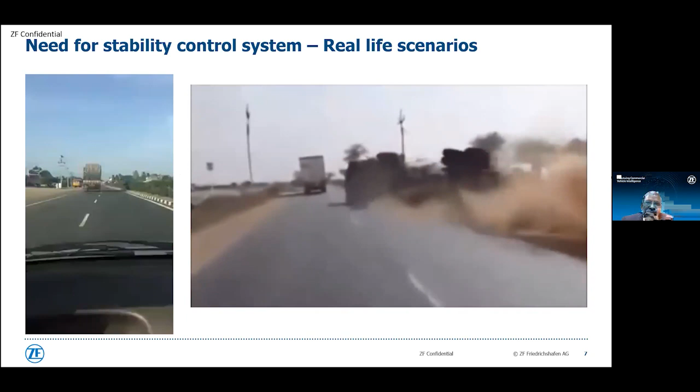You can also see the other slide, other video.

What these two videos actually tell us is that it's not adequate to have only the directional stability which ABS provides. The lateral stability, which is called roll stability, and vehicle skidding, which is called yaw control, are very important to keep the vehicle stable under very dangerous driving conditions.

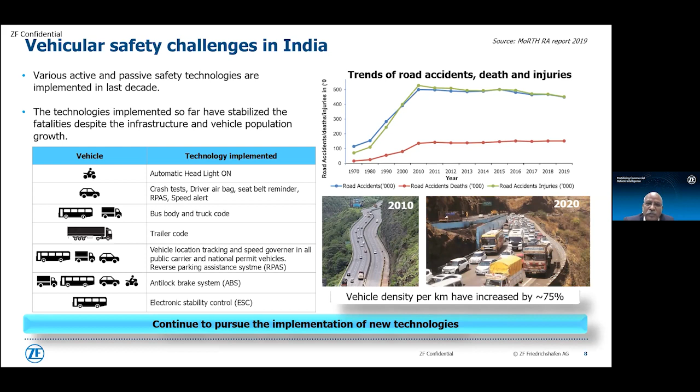I think India holds the dubious distinction of the largest number of road fatalities anywhere in the world. Even though we are only about 1% of the vehicle park, about 8% of road accidents happen in India. So the technologies implemented so far have stabilized the fatalities, but we have a long way to go. It has been stabilized despite the poor infrastructure and very high vehicle population growth and the increasing power and speed of the vehicles.

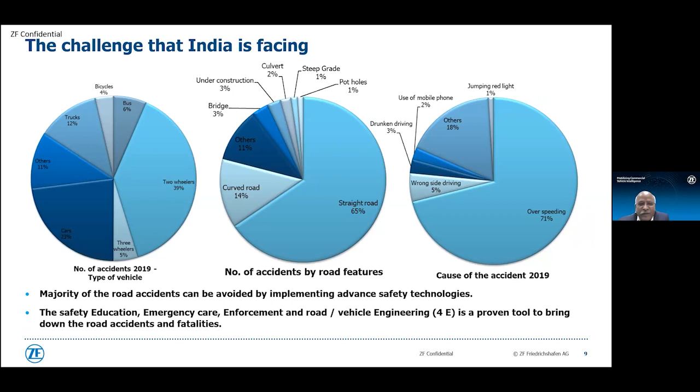Now I come to the electronic stability control itself. As I said earlier, ESC is the first step towards autonomous driving.

It automatically intervenes to improve the vehicle stability against roll and skidding. Unlike ABS, which actually comes into effect on very panic braking conditions, on those critical incidents.

But in the case of electronic stability control, it actually monitors the stability of the vehicle in real time, and then it intervenes whenever the vehicle becomes unstable, automatically. I would say in a way it's like a hand of God to the driver, because without his recognizing it, this actually constantly monitors the stability of the vehicle and applies the brake or intervenes in an intelligent manner and brings the vehicle to control. That essentially is the role of ESC.

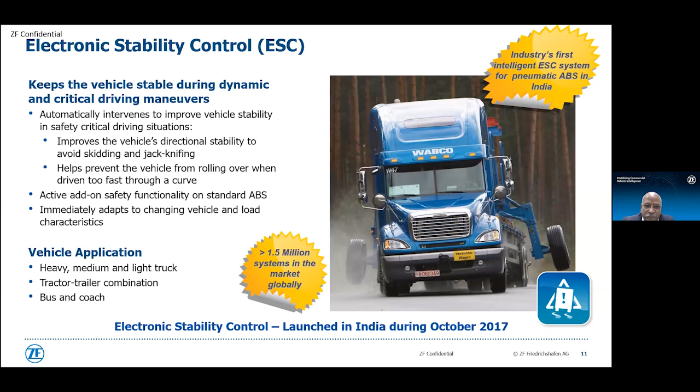The system automatically applies brakes on all wheels to avoid rollover. Selective wheels are also braked to provide yaw control to avoid vehicle skidding. The lateral acceleration, yaw, and steering angle are the critical inputs for the system to keep the vehicle under control. The vehicle constantly monitors the lateral acceleration, yaw, and steering angle in real time, and these are the key inputs for the ESC to bring the vehicle to stability.

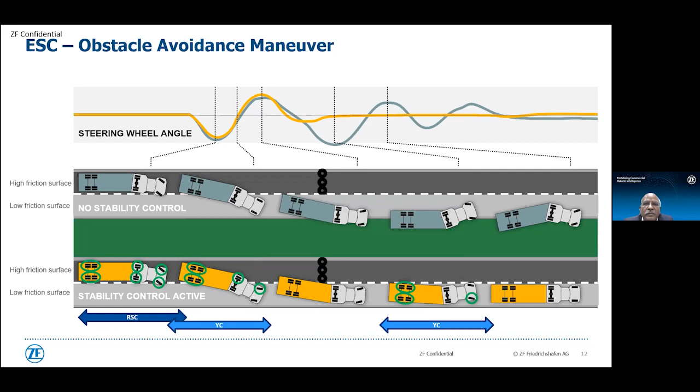The closed loop system continuously monitors the vehicle behavior around its vertical axis and automatically performs engine control or brake control depending upon the critical driving conditions.

The closed loop system continuously monitors the vehicle behavior around its longitudinal axis as well, both in the vertical axis and in the longitudinal axis, and automatically performs engine control and brake control depending upon critical driving conditions. This essentially explains the way the control is affected in real time.

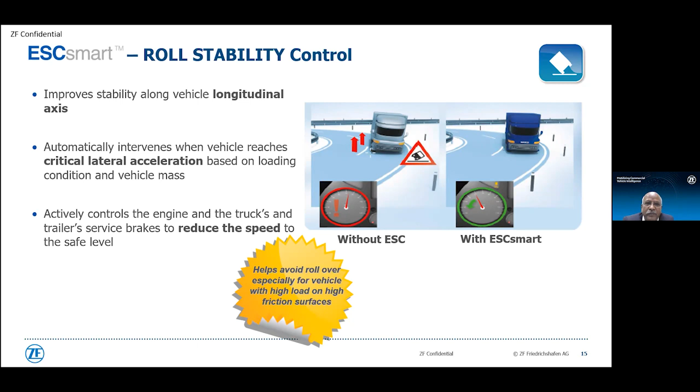Now on the video, I have one here. You can just see a video.

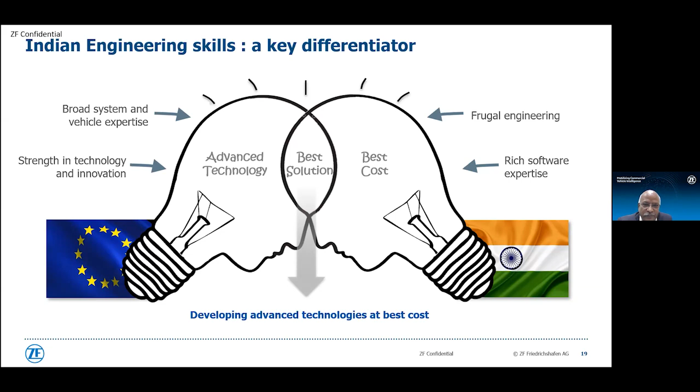Indian road conditions are very unique. Any global system cannot just be adopted as it is without proper refinement to suit Indian usage conditions. So

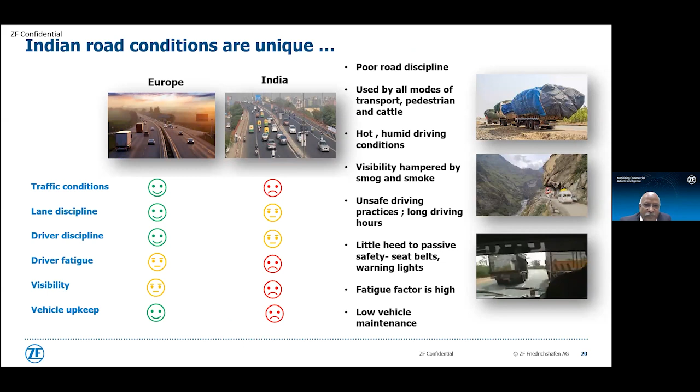We follow a unique approach to refine the electronic stability control to suit Indian driving conditions. Actual usage condition data was created by driving the vehicles pan-India, covering multiple terrains, traffic and climatic conditions.

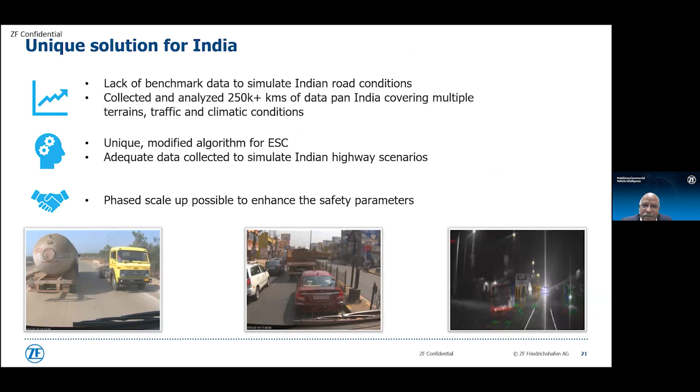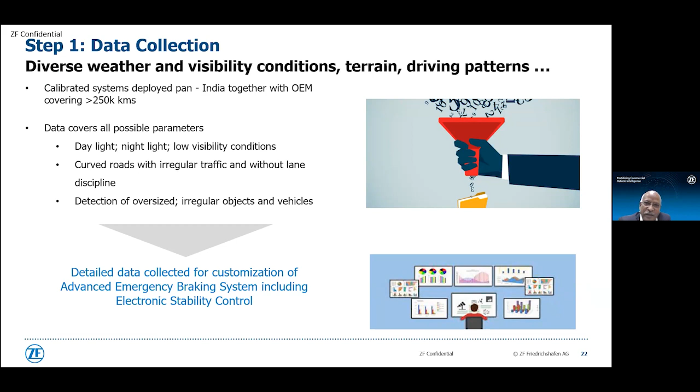This gathered data was filtered to arrive at appropriate fine tuning in the ESC algorithm. So the solution we are offering in India, or what is required to be done in India, is essentially not what is available in Europe or any part of the world. It should be adapted and tweaked to the Indian requirements. That's the message. The database refinement helped to arrive at a best-in-class ESC system to suit Indian driving conditions.

An example of a double lane maneuver is shown here, and the left side graphs indicate lateral acceleration versus time. With ESC off, vehicle speed at exit is 69 kmph which will lead to vehicle rollover. With ESC on, vehicle exit speed is 55 kmph due to system intervention, and the vehicle is stable. The right side graphs show the yaw movement of the vehicle, which is also controlled due to system intervention. The threshold values are defined for every vehicle platform to arrive at final parameters.

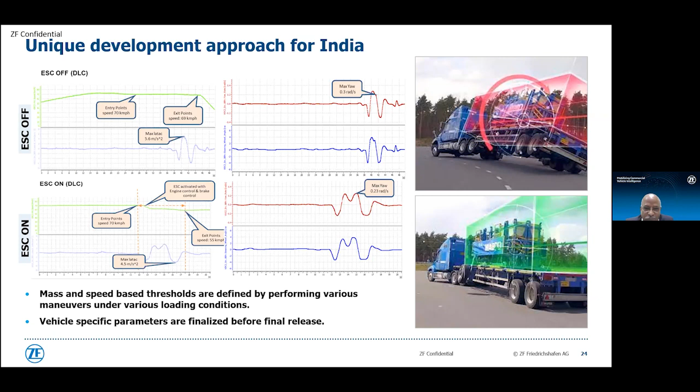In slide number 25, various maneuvers are performed to simulate roll and yaw under different loading conditions of the vehicle. Same maneuvers are used during homologation to assess comparative performance with ESC off and ESC on.

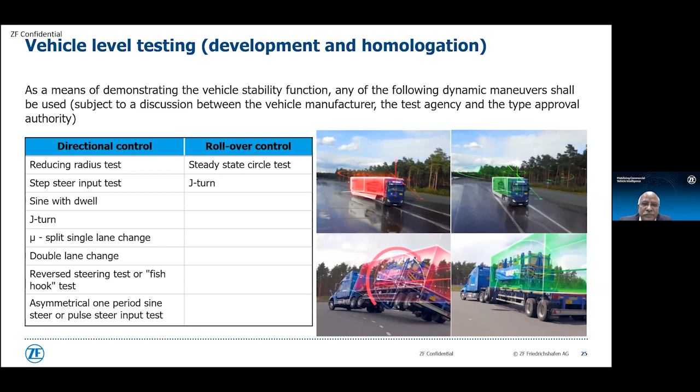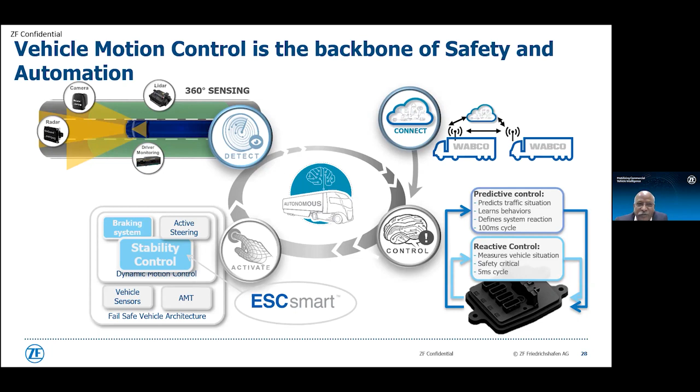I have a few more slides to share on how ESC is actually a building block for autonomous driving. ESC is the first step towards autonomous braking. This is the stability control, the first step towards autonomous braking. Additional sensing devices like radar and camera pave the way forward towards autonomous emergency braking systems. So you have the basic ESC on which you build further capabilities using cameras, radars, and various sensing systems.

ZF is a one-stop solution for sensing, processing, and actuation technologies to achieve level 4 autonomous braking. As I said, the basis is ESC. ESC, along with various ADAS technologies, are the enablers of next generation mobility.

Towards better safety, fuel efficiency, and optimized vehicle integration, ESC works with the various advanced driver assistance systems and builds that intelligence to provide those capabilities. ZF is a technology partner to bring next generation mobility.

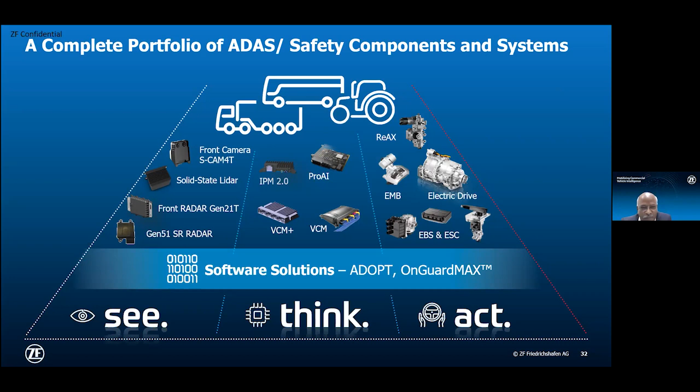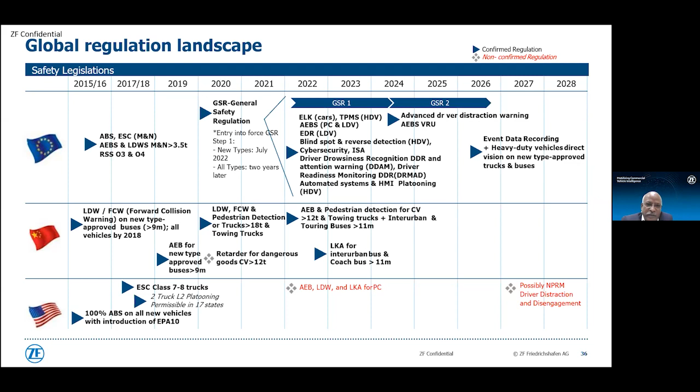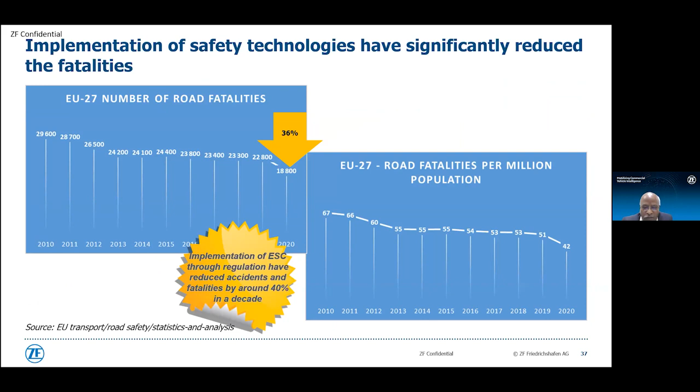And that completes my presentation. I think we have another 15 minutes, so we can have discussions and take questions. Thank you so much. We have a few questions, so first I would like to take the first question.

The first question is from Mr. Ajay Sankaran. He wants to know, in the slide of side radar, if the vehicle detects a moving obstacle in its blind spot, how can we make it detect whether that vehicle is stopping, or should we stop to avoid mistakes? I have some of my experts here, so I will take support from them.

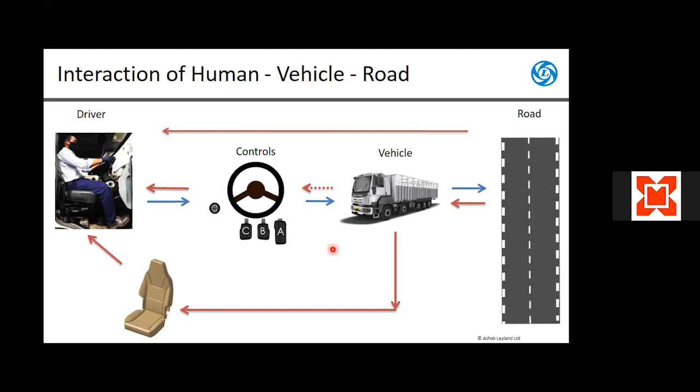So in general, if you commonize or generalize all these expectations in the controls, there are three things which come to mind. First is safety - you should always feel that the controls are safe. You shouldn't get stuck, you shouldn't get a shock load. So you should get a sense of safety first.

And then comfort. So all these controls, typically the driver holds or operates this continuously during driving, and in a day sometimes trucks cover around 400, 500 kilometers. So in all these things, they should have minimal fatigue impact. You cannot have larger efforts. At the same time, it should also give a feedback.

Now coming back to the last point of giving confidence - this is one of the most important things. While ensuring the lowest level of forces to make it comfortable, we should also give a sense of feedback control that gives overall confidence. Like I said earlier, you apply a brake, the pedal moves, you're getting a higher force level in the foot, but the vehicle is not stopping yet. If you still apply more brakes, it may end up in a full stop, but since you are not getting that feedback, you won't feel confident about the braking at all.

This happens even in steering. You can try to get this feedback. Typically, if you drive back-to-back different cars from different OEMs, you may sense this immediately - how they have their brand statement and how it is set up. Typically, as you increase the corner, there'll be an increase in force, and when you come to the center position, there'll be a reduction in force. And even over a straight line, you should get a feedback in the steering wheel saying that you are remaining in the center region and not going too far away.

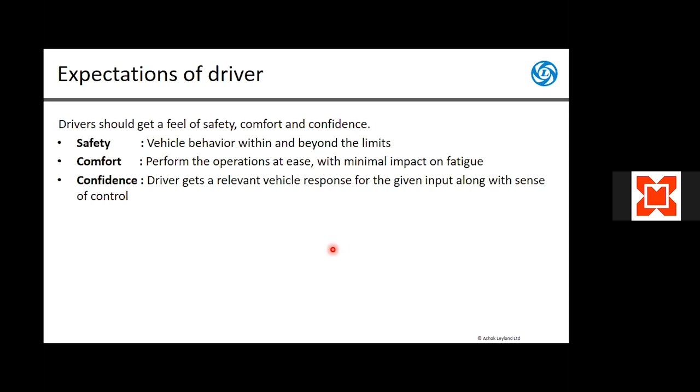We call this a major attribute, and then these major attributes again apply to the individual topics of safety, confidence, and comfort, and can further be detailed into sub-parameters, or sub-attributes. I have listed down some of the key sub-attributes here. In case of ride and handling: bounce, roll, and pitch.

For example, if the vehicle rolls - if you negotiate a corner and the vehicle typically rolls - depending on the amount of roll you experience, you may get a sense of safety or you may feel unsafe about it. And for example, when the driver applies a brake, either you as a driver or as a passenger, if there is a diving or pitching motion, you may feel a little more unsafe about it.

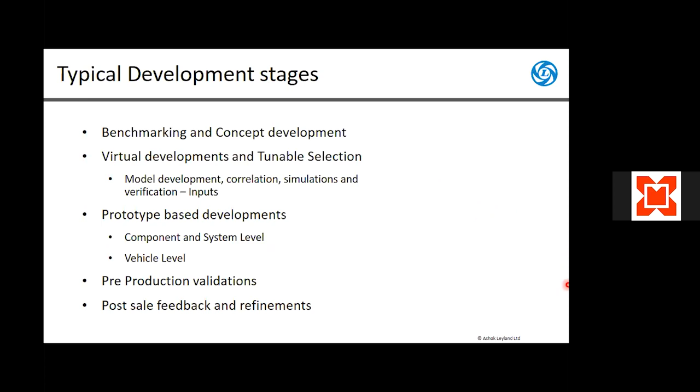And the methods adopted - while doing all these things, typically these are the three major methods which we use during each development stage: subjective assessment, objective measurements, and virtual simulation.

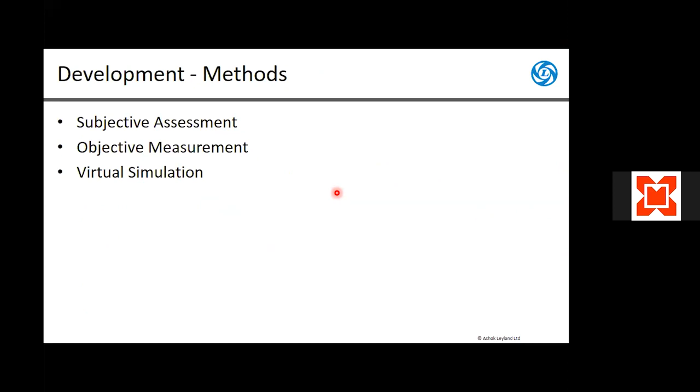We'll look at each of these in great detail. First is subjective assessment. I think if you're in this conference, you've heard a lot about subjective assessment.

To start from the basics, typically what happens here is the driver or an engineer drives the vehicle physically in the real world condition, and then evaluates the vehicle on different parameters. Based on that evaluation, qualitatively, he will give a feedback about it. So these are more based on the subjective, meaning his own judgment of it, how it feels.

It's very, very important - everybody will understand it's all about the control, and until you sit in the driver's seat, you won't know how it perceives, how the control perceives. So typically everything starts and ends with the subjective assessment. You start with understanding how your benchmark feels, and you end up in the final product and how your customer feels about that product - whatever you engineered, whatever you targeted - whether the customer is also getting the same feedback subjectively. So it starts and ends in a subjective field. This is one of the very important tools or methods, I would say.

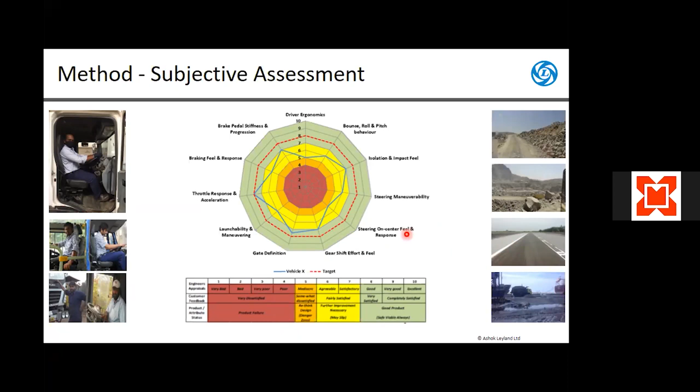So is all this subjectivity good? To support this subjectivity, there needs to be a lot of measurements. Although there are a lot of debates depending on attributes about what you can objectively measure, and some attributes you may not be able to clearly measure, you still tend to measure and try to come to a closer measurement, which will communicate to the driver, the engineers developing the system, or the simulation engineer simulating the system, to improve performance.

Because unless you measure anything, you cannot manage. Typically this is a statement, right? So finally you want to measure. You can see some of the instruments typically used. The top ones are accelerometers.

Uniaxial accelerometers, triaxial accelerometers - you place these everywhere, typically at the kingpin, in terms of trucks, on the axle, just above the suspensions, above the chassis, near the engine location, and capture the vibrations. The intensity of the vibration, the frequency at which it happens, the way it gets transmitted - all this will be assessed using this vibration data.

Sometimes you also use string potentiometers to measure how the suspension travels. This also gives a lot of indication. If you want to calculate the roll, you find out the left and right suspension travel, and based on this you calculate the roll and find out whether this roll is okay or not.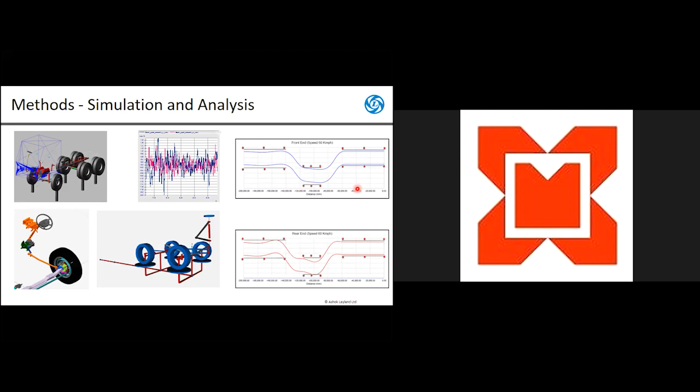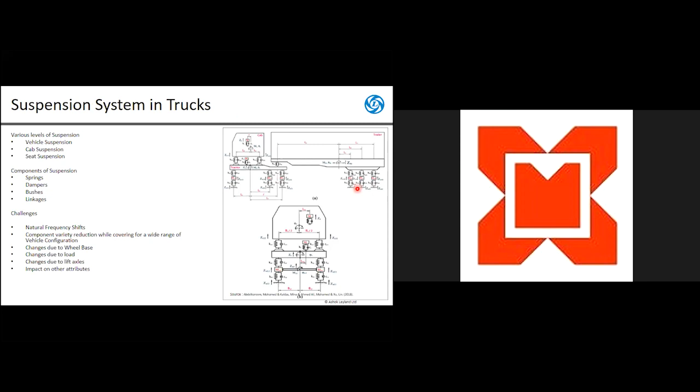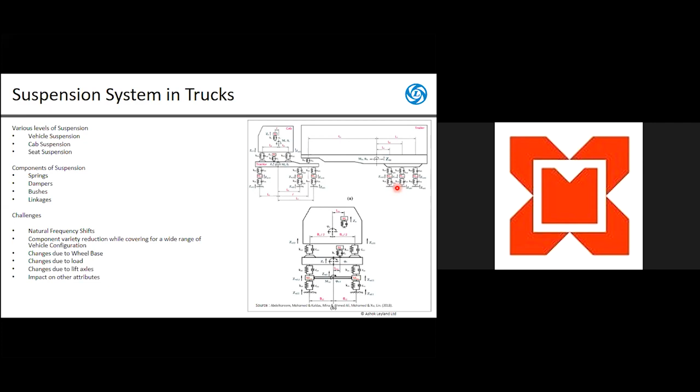Now coming to the complexity in terms of trucks - unlike typical cars, you have multi-level suspension. You have the vehicle suspension primarily, where the tires act as an isolation component with mass and damping. Then you have the primary or chassis springs, dampers, and bump stops. And then one more layer called the cab suspension, where you again have a lot of kinematics and suspension. Depending on the configuration, there'll be more variants like front pivoted, front hard suspended, or rear suspended vehicle.

And there are rigid cabs where you don't have any suspension at all - all four corners are supported by bushes. There is also a complete fully suspended cabin where you have springs and dampers in all four corners, with their own anti-roll bars and their own end-stop bushes. This makes it more complex as well. Why do you need suspension in the cabin?

Again, another challenge in the typical truck is the load change. Unlike typical other vehicles, the change in load is very, very vast. For a truck, the unladen weight will be around 4 to 5 tons, and laden weight will be around 10 tons - almost a 2 times increase. In the rear, it is much larger, 4 to 5 times between laden and unladen condition. This gives a unique challenge - you may want different suspension, but you still have the same suspension, right?

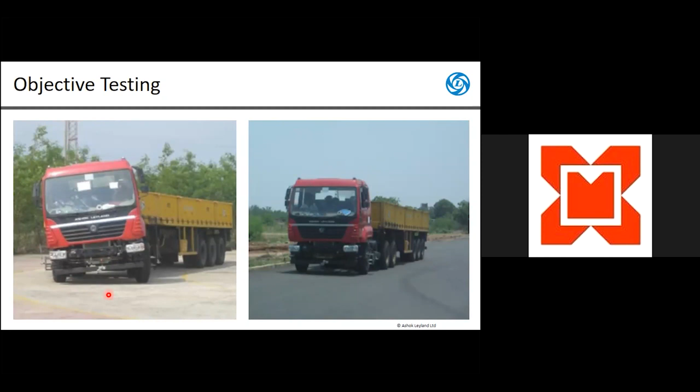Coming back to the steering system, as we discussed, it'll typically be hydraulic-assisted. There's also a norm which says that without even assistance, this is the maximum load you can sense at the steering wheel. So you may end up in a situation where you want to give a lot of assistance, but without assistance, it should still perform well.

When it comes to assistance level, there are a lot more technologies available, but till today, the wide range of products goes with plain hydraulic assistance, and you want to tune this assistance level to create a sense of safety, comfort, and confidence.

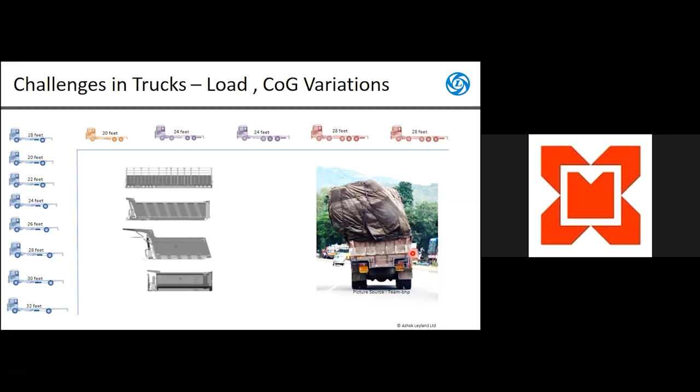And the challenges, as we saw in the videos earlier today, how typically the customers use and abuse this. Typically, in a situation in India, in an uncontrolled market, how things are loaded. For example, a loose load - whether even after adding things like ESP and others, will it mitigate the problems of having a loose load? Whether longer pipes or very concentrated loads affect how it acts. These are typical challenges which, going forward, we have to work on.

I'll skip this slide, but the only point I wanted to make here is we are moving towards a virtual world, to save on time and cost. Mostly the future is definitely going to be virtual development, and most of the effort will go into this, where we have to do a lot of model development, refinement, and correlation between the real and the virtual world.

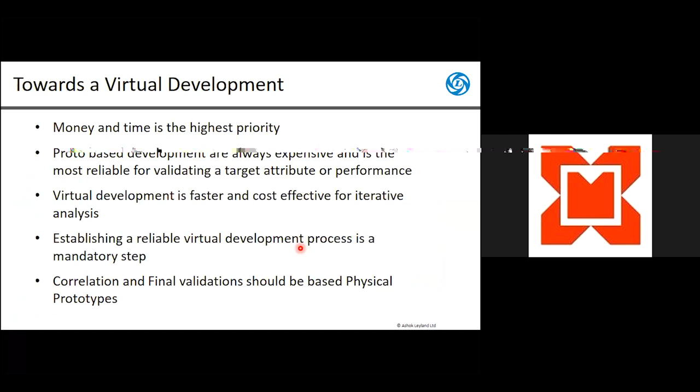I wanted to spend some time on this for anyone new to this field of vehicle dynamics, or an aspiring engineer who wants to learn more. Some points for them: first, aim for a full stack development. As we saw, there will be a lot of assessment in the way you look at this - one is subjective assessment, one is objective measurement. You do a lot of virtual models and work on different technologies. But if you really want to excel, or understand the whole world, you should work on all of these aspects.

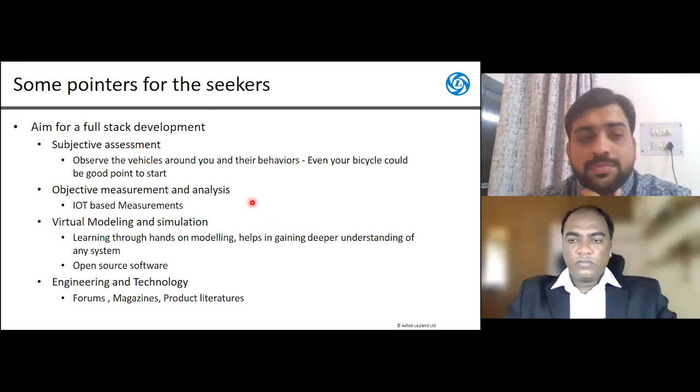Now, do you really need to get into a real industry engineering setting, or real development areas or OEMs? No, you can even use your bicycle and understand these things. You can even observe a lot of trucks and buses or other vehicles on the road. I have seen a lot of engineers doing this, and inspired by them, observing and then ending up working in the real world, in a typical industrial setting. So your observation is the key here.

Whether you travel in a bus, you keep observing, find out what happens, how the driver is doing all these activities - that's one aspect. Another is objective measurements. You need not end up waiting for expensive measurement tools. You can explore latest IoT technologies, cheap accelerometers and other things, whether we can use this as a tool to understand this.

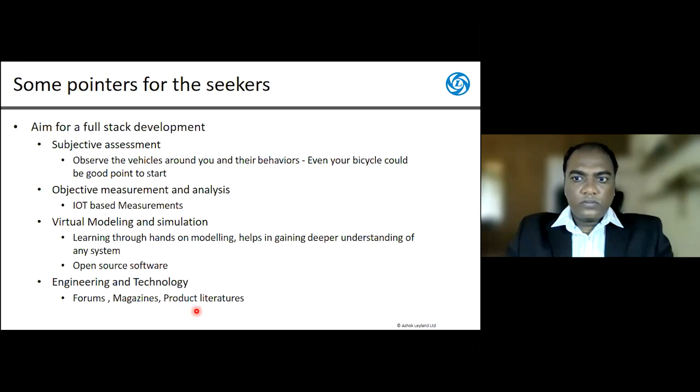And virtual modeling - I very strongly advise you to work on developing your own models hands-on, not use the models of others. Try with your own hand, not necessarily with any very high-end softwares. Even start with a simple hand calculation or an Excel sheet or tools like Python. I have one more slide giving you a thought about this, the open source software, where I have some thoughts. And then engineering and technology - you need not really get all these things in an industrial setting. You can also look for forums, magazines, and product literatures to get some understanding about the product, the components, and then use this as a starting point for doing your calculations and maths.

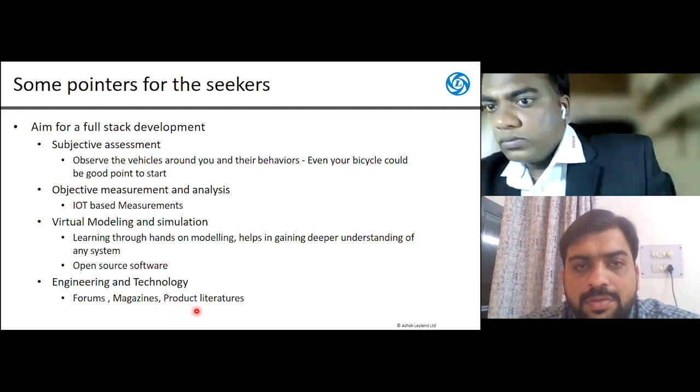This is one very interesting software which I came across, Open Modelica. What is this? This is a Modelica-based modeling and simulation environment. It is open source, so even a student can use this. They typically come up with drag and drop models. If you want, you can also get into a lot of detail and work on the equations as well. You can see them visually working on, and you can work on the equations level.

And if you have the means, you can also purchase proprietary softwares and extend this capability further, deeper. So this is an open source software, but using the same model, you can put it into a proprietary software as well and develop it. This software is very much integratable with other things like Python, MATLAB, Julia. Therefore, if you want to do an iterative development, or understand how a sensitivity analysis needs to be performed, it can be integrated with others.

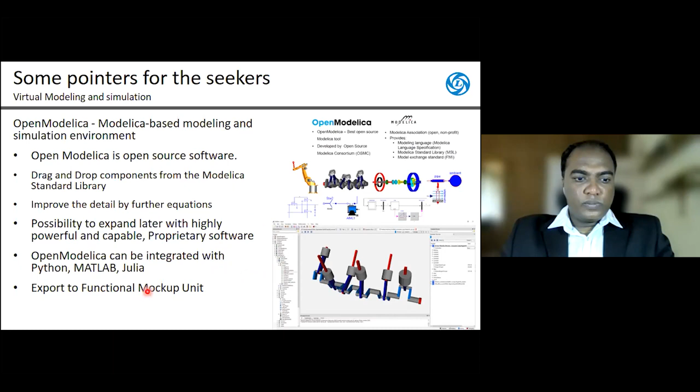A very interesting and important feature, I think one of the new technologies, is the functional mockup unit. You can export this model into a functional mockup unit, and this, I believe, is an important technology because in a typical OE setting, you cannot share or extend the model since it has a lot of proprietary content. So what this functional mockup unit does is encapsulate all the models, the parameters, the inputs, everything into a digital model.

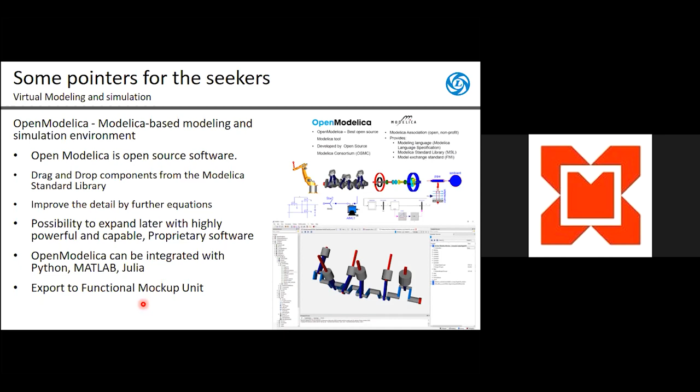It won't expose all the equations underneath. At the same time, you can share it and use it across other simulation softwares - in recent times, they have an interface for doing this, and this interface is standardized at different levels. So FMI 1, FMI 2 - these are the various levels of standards getting implemented. I believe this is one of the futuristic technologies which will come into play, and it's very important when people work at a component level in the early stage of programs.

Thank you, thank you for your patient listening.

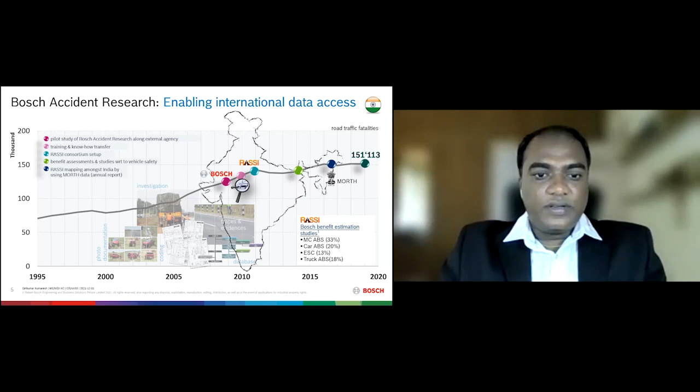Today I will get you into how exactly we do one particular loss of control accident - that's one type of accident. As I was talking about RASSI, Road Accident Sampling System, this is not Bosch alone. It's almost 80% of Indian OEMs and auto suppliers in the team. We all pool money together, share the common raw database, and each team takes the database and starts interpreting it for their own benefit. So this is a consortia where we all sign up together, spend the same money, and access the same data.

If you ask me what the data consists of - scale pictures, images, reconstruction, feed photos, and different parameters. For one accident, we collect close to 1,200 parameters, which talk about vehicle damage, road condition, weather condition, injury status, and which part has the injury - all coded by Abbreviated Injury Scale called AIS. We also understand initial velocity, final velocity, delta V change, and everything. This is how we get this data, and then we develop and do a detailed analysis.

We have teams collecting till now in Jaipur, Ahmedabad, Mumbai-Pune Express Highway, Coimbatore, and Kolkata. The team is stationed there. As soon as an accident occurs, the team is informed either by the police, by locals, or by their own communication channel. The team drives to the nearest accident scene within 2-3 square kilometers, covering all aspects of it, and then we collect the data.

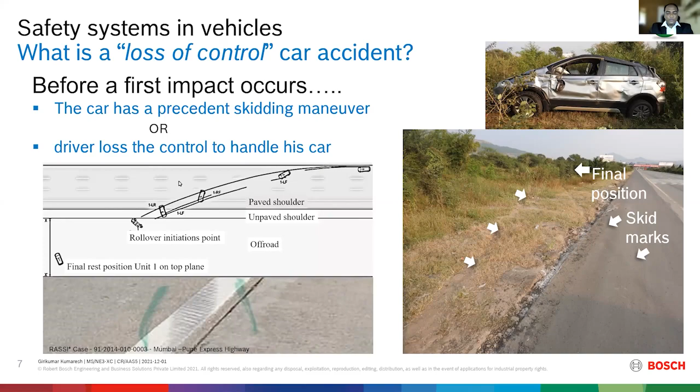The skid marks clearly tell the story—so in most of my accident analyses, when I go to the spot, if I see these tyre marks, that means 100% it's a skid, meaning 100% the driver lost control. Now my question is whether the driver lost control prior to the collision or post collision.

Post collision is when you have some obstacle—for example a pole, a brick, a pavement, or a boulder. You hit that, then do a counter steer, then lose control, producing a tyre-mark skid. That means the first collision happened, and the subsequent second collision is the skid.

In many cases, the skid happens just before the collision itself, and then the collision happens. So when you go to the accident site, you see a skid mark which is very evident, but it's challenging to identify whether it occurred before or after the first collision. That's the overall point, and this is how it is.

Before the first impact occurs, the car has a precedent skid maneuver which can be evidently seen, and the driver loses control—meaning he's trying to handle the car as much as possible, but it is not possible. Now I'll give you another hint.

How do you identify whether the skid occurred prior to or post collision? At any point where you see an obstacle or collision point, if you see debris of glass pieces or marks prior to the tyre skid mark or after it, you can clearly understand whether the accident happened before or after the collision point.

So post collision, you have the debris and windshield pieces, shattered glass pieces, and then you have a tyre skid mark.

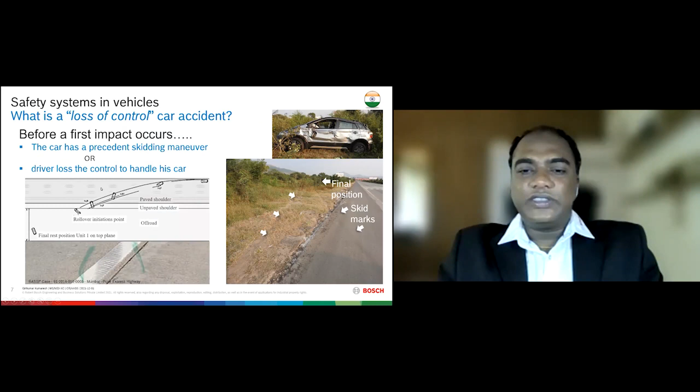So the initial situation is the driver lost control due to oversteering. The reason could be many. Why did he oversteer? Then you have a collision, which could be a simple landing over of the vehicle, a collision with a pole, or a rollover.

Maximum truck accidents roll because the CGs are much higher and the loading conditions are so different that you get a little bit of spin over the vehicle, then a total rollover. In cars, not so much, but still we see like 50 to 60% of accidents prior to collision only with skidding have a rollover.

So rollover and loss of control happen in two main mechanisms: oversteering and understeering. Oversteering is when the vehicle is spinning the rear axle of the vehicle.

If you see here, when you're driving a curve, you will experience that if you're trying to steer your car towards your right, the rear end of the vehicle is pulling out, and many people call it banking - they say it's because of centrifugal force, centripetal force and everything. But the real truth is the yaw velocity is too large, so the vehicle is not able to keep itself intact to the line of motion.

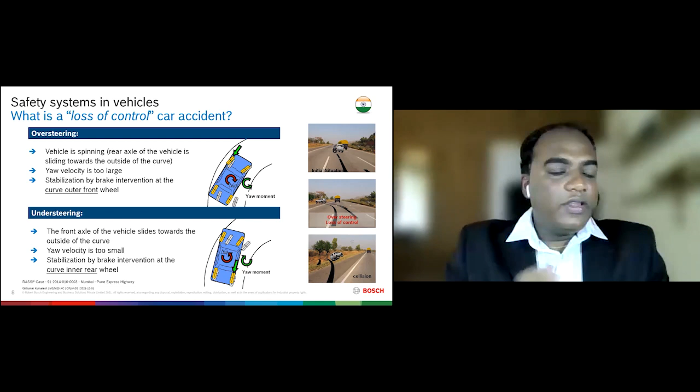Now the same thing happens in the opposite way in understeering. You try to negotiate a curve very quickly and give too small a yaw velocity to the steering wheel, then the vehicle tends to roll outside the curve. This is understeering. These are the two important conditions of loss-of-control accidents.

That's where you have to stabilize the vehicle. How do you stabilize the vehicle? I will explain in the upcoming slide.

So as I said, this is the accident site. What do you see here? This is the same case - I'm talking about only one case, explaining it in detail.

You see the damaged cars here, and an unbelted occupant with an impact on the windshield. And you see the long skid - I showed the previous picture started from here, and then the vehicle ended here. The skid marks are almost 60, 70, or 100 meters before it.

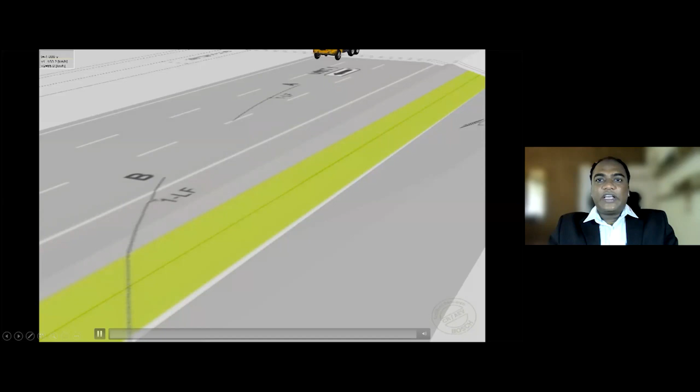I'll just show you how exactly this accident happened. He saw another truck, then tried to steer to his right to avoid an accident or try to overtake - we don't know the reason - but the vehicle completely lost control and went off the track. This is a seriously injured case.

This is how the roll happened, and all these evidences are marked. What you see is data reconstructed from PC-Crash, and it's not just an animation - you have close to 250 parameters embedded into it, and the whole accident is reconstructed.

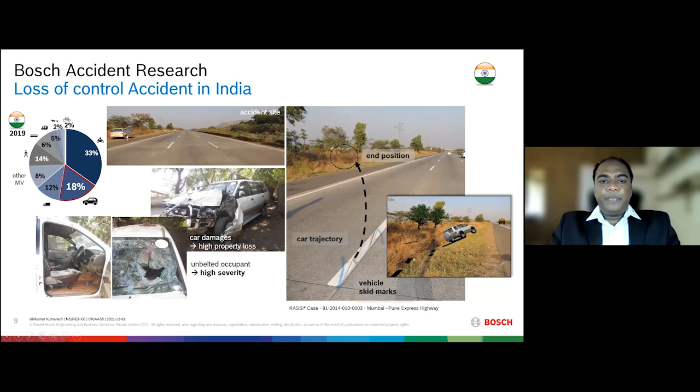Now, what are the real root causes of accidents specific to India? So in India, you see human error and infrastructure related causes, but again I divide this into two phases: pre-crash and crash. In the pre-crash phase it's mainly human error and infrastructure related. In the crash phase also it's infrastructure related. The point is you cannot sum it up because it's individually analyzed.

In human error, you have overspeeding, driver inattention, and drowsiness. It's quite obvious that a sleepy driver gives a sudden jerk and the vehicle again goes for a toss, and a drowsy driver also gives a sudden jerk. With overspeeding, it's sometimes real hard to judge the oncoming vehicle.

And infrastructure related - you have poor marking, poor banking of roads especially in the curvatures, and slippery road surfaces.

Oversteering situations are also related to man-made objects, trees, and intrusions. This is an important factor seen quite evidently in India. You have a loss of control after the first collision, because concrete boulders kept as median demarcation become the first impact when a vehicle loses control, and that boulder initiates the roll or the loss of control. So we are artificially imbibing systems into the accident mechanism, creating more severity through unscientifically designed infrastructure.

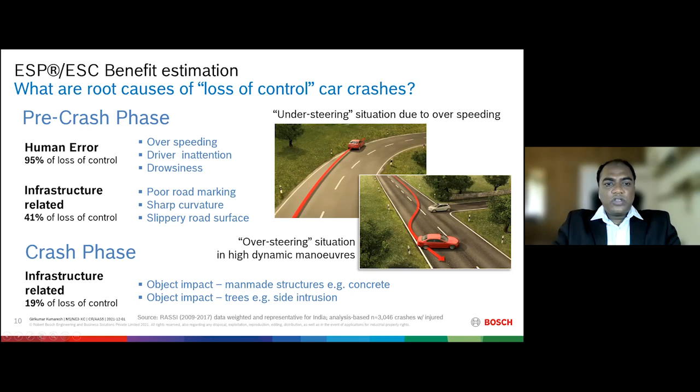The mechanism is similar for any vehicle type, even trucks. Now let me explain the working principle of ESP. Lots of videos exist to understand how electronic stability control works, and previous engineers and panelists showed different videos. I don't want to bring in a video since you're already seeing me in one.

So I'll give a real perspective through a small explanation. The system consists of 5 components: a hydraulic unit attached to the control, which you can consider as the ECU; a wheel speed sensor; a steering angle sensor; and a yaw rate sensor. The steering angle sensor is usually on the steering, with steering angle and yaw rate usually in the middle. Then you have the ECU which decides.

Whenever the vehicle is losing control, if it's going and suddenly you see an object, the driver tries to counter steer left or right depending on intention. When steering to the left, the vehicle responds, but if the steering control is a bit more than intended, the vehicle may not behave as the driver wants. The intended direction is shown, but red indicates the direction the vehicle is actually slipping toward.

If this slipping becomes more severe, you get a direct straight collision with a clear yaw mark on the road, and the vehicle loses control. No matter what the driver does with braking, it's impossible to get the vehicle back in control once it moves beyond the minimum intended slip angle, which is measured by the yaw rate.

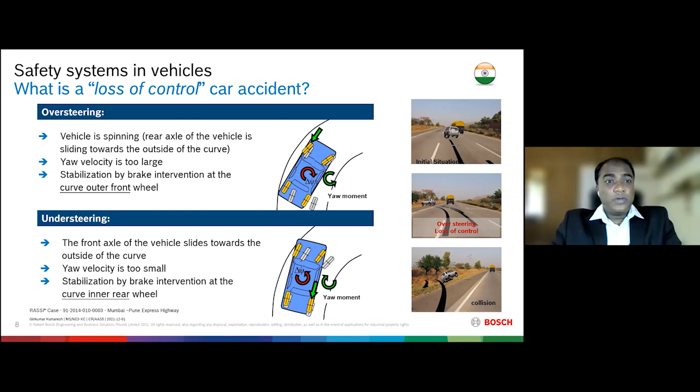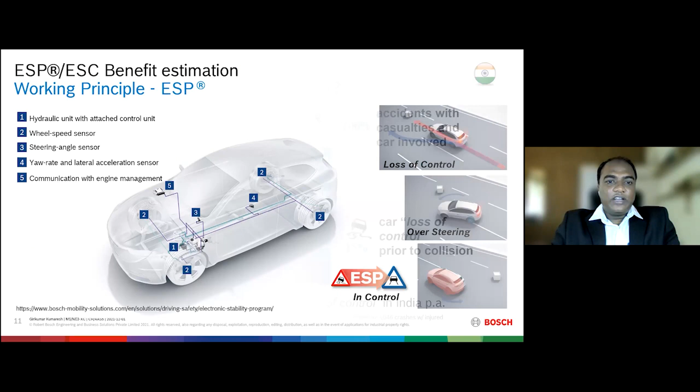Okay, so that's how ESP works. So it's simple. Now, what is its relevance for India? This is the real challenge when I started working on it.

When we drilled into detail on loss of control accidents, most are single vehicle accidents. The vehicle is driving, the driver either loses sleep or tries to oversteer or overtake, and without a secondary impact, the vehicle loses control and hits the barricade or goes off the road. In India, the complex problem is that nobody reports a single vehicle accident. If the car is alone and hits a tree, the reporting does not happen, because the Indian system is designed such that for an accident, two parties have to be there—one is the victim who met with the accident, and the other is the causer of the accident. But in a single vehicle accident, that second party isn't there.

When we drilled into US and Germany data, we saw 40% of accidents were single vehicle accidents, because they have a proper recording system. When I was about to do this electronic stability control analysis, I saw less than 2% of accidents were loss of control, and that too non-reported. That's where we identified there's something wrong.

Then we drilled into the details and did a representative analysis of how exactly this data can be weighted, and what you see here is what exactly India is today. This research is again released with the representative analysis for India—how you extrapolate from 5 different locations to the whole of India is what we discussed.

So what you see here is that almost 270,000 accidents are involving cars with casualties—that is what's reported. Then you have 857,000 as the total car accidents with casualties, and the overall accident number is 1,286,000. That's how we call it, almost 1.28 million.

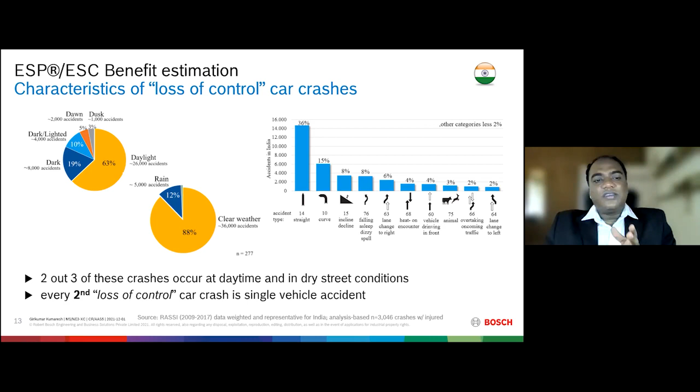Every second loss-of-control crash is a single crash event. That means if I have 100 cases, 50 are single vehicle crashes. Of that 50 out of 100, around 40 cases are not reported. So this brings me to how technology can avoid this.

Now, in most panels we get the same question: what is the cost benefit? This is a very big question we could not answer almost since a decade, because if somebody can say what is the cost involved if one person dies in an accident, we do not have this number.

If you compare to the Western world, you have this number released either from the Ministry of Home, Ministry of Health, or Ministry of Internal Affairs. But in India there are totally different numbers. Insurance guys say some other number, Indian Statistical Institute says some other number, and a uniform number was not available.

We took almost 2.5 years to study close to 300 reports across India and the globe, conducted close to 150 interviews on phone calls and other things during the lockdown phase, and we estimated socioeconomic loss for India altogether, independent of car.

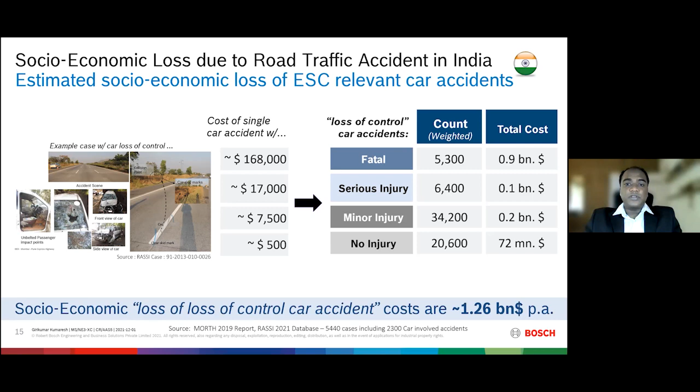I also request the panelists and participants to take up this paper and try to read it, and you are free to develop more methodologies on top of it. This is the base of the method, and this brings us to the last slide to clearly discuss loss of control accidents, which is common in India, and the only thing is, it is not reported.

We have to be really specific. There are a few more types of accidents which are not often seen but are killing so many people. So accident research, the real root cause analysis, going to the scene, doing Sherlock Holmes work, is the real thrill in identifying what is really important.

Then the root cause - inappropriate speed, drug abuse, visibility condition, but less impact through weather condition - is clearly derived out of this particular study.

The potential is up to 33,000 accidents, with total numbering 20,000 road fatalities and severely injured. It's clubbed again - road fatalities and severely injured together. 20,000 people could be altogether avoided with electronic stability control. As I said, this one line does not belong to this particular study, but it comes from the latest research.

To give the link for the next line, social impact for road accident crashes starts up to $38 billion. This is the first time ever we did this study, which constitutes 1.35% GDP annually. Thereof, electronic stability control and the relevant costs constitute about $1.26 billion per year. This is only the vehicle estimated.

Still, infrastructure and human cost is not added to it. If you add that, then we have another number. ESP facts, already published by Bosch: 80% of all skidding accidents, irrespective of region or country, can be directly avoided by electronic stability control. For more information, you can refer to the benefit estimation of electronic stability control in SAE International.

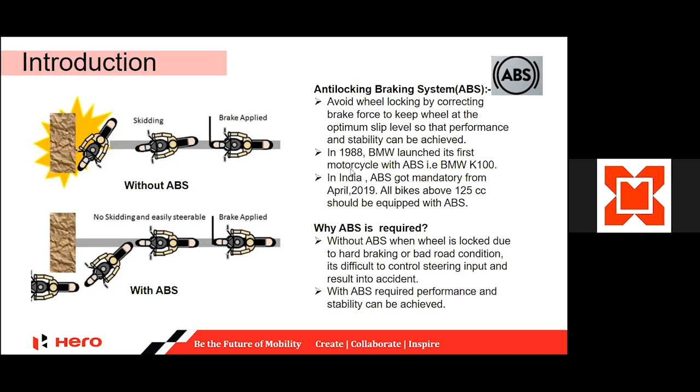And moreover, with ABS, we are getting whatever the rider wants. For example, for performance we are also getting in line with that, and also the stability we are achieving, which ensures the safety. So this is the introduction part.

Now I will go into the basic concept of how ABS actually works. I'm discussing single channel here because it is similar to two channel, four channel, which is in the four-wheeler. So what will happen?

Initially our ECU, we call it HECU, which is hydraulic electronic control unit. Why is it called HECU? HCU plus ECU means electronic and hydraulic valves are inside. So we used to call it HECU, and in four-wheelers we call it ESP, ABS, different HECU, HCU — that's the naming by different tiers and OEMs to rename the object in their portfolio.

So basically, first the ECU will detect the wheel — how it will detect the slip. For example, in a single channel system, there is a slip when the user applies a brake, and there are deceleration values we are getting. With that deceleration, the system will detect whether the deceleration drop is smooth or sudden. Based on that, it will calculate the slip.

When it calculates the slip, this depends totally on the vehicle dynamics and how you want the vehicle to behave — whether you want more performance or more stability. Both are inversely proportional; if you are going towards performance, you have to compromise on stability.

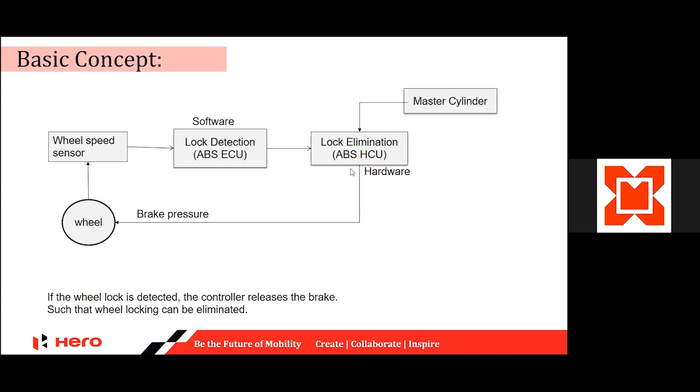So ABS will detect the wheel spin and wheel slip, and then give internal calculation to its ECU. The ECU will do some calculation and send it to the HECU to open and close the valve. So in single channel, for each wheel control, it requires a minimum of two valves to work the ABS along with the motors. This is the basic concept, useful for starters as well as a reminder for those who already know this.

Next, we'll move to the interface components — what is required for the ABS to work properly. For ABS alone in a two-wheeler, it is sufficient if we are getting a tone wheel with wheel speed input, like pulse rate to the ECU, along with power supply — that is sufficient for ABS to control the vehicle.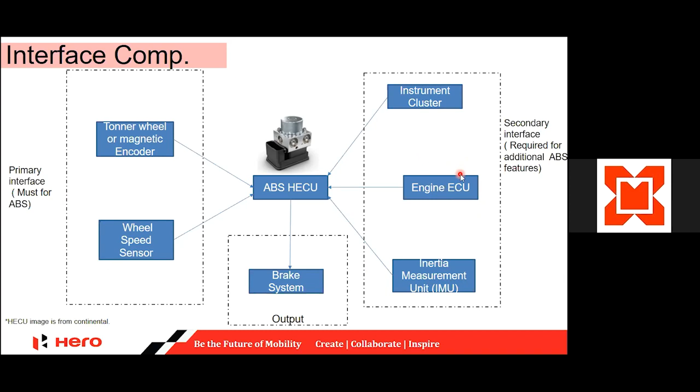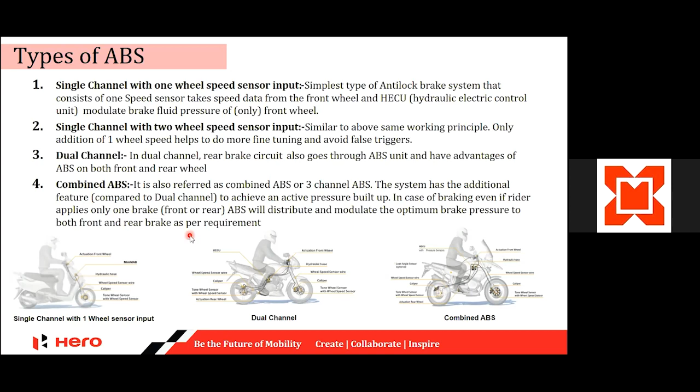Fourth, we have combined ABS. This is a new technology that some OEMs have already implemented and some are still working on. This combined brake system is similar to what we usually have in the Activa, a combined braking system. It helps in making the weight transfer common. For example, if you apply the front brake, the weight transfer goes to the front, and there's a tendency for the rear to lose traction and lift off. But in combined ABS, braking will be split according to the tuning requirement from OEMs. So these are the four types of ABS currently available and coming soon.

Now we know ABS serves a safety point, but safety plus features is always an attraction point to the user. Some features help with the stability of motorcycles, and give you options to select ride modes and traction control, similar to four-wheelers. All these features are currently in the market or going to come, and sooner or later ADAS technology will also come to motorcycles.

As we could see, the XUV700 is one four-wheeler example. In the Gloster in India, it is still working fine because there's a lot of data needed for ADAS tuning, like how the system detects whether it's actually a person or an obstacle. All this plays a vital role in implementing this feature in the market, because it can give a negative outcome too.

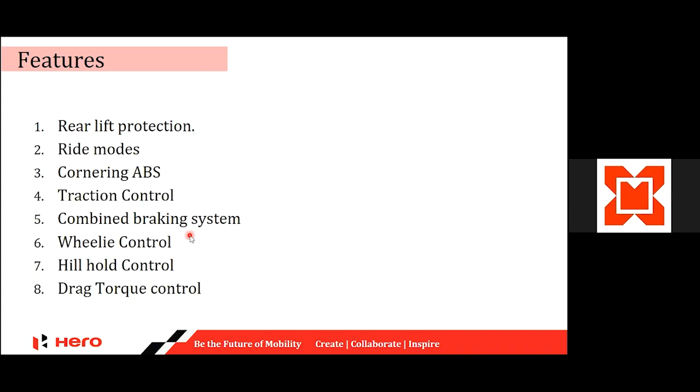Then second, we have ride modes. In many templates, we have modes like rain mode, race mode, sport mode, off-road pro mode, using market abbreviations for some of the modes available in the vehicle.

So basically in the ride modes, we have different maps of ABS. For example, you want ABS to kick in later, you want early intervention, you want ABS to behave normal, or you want to cut down ABS on the rear wheel. All these can be controlled through ride modes.

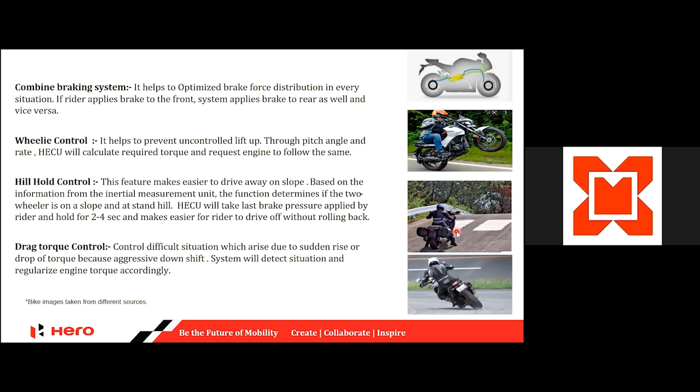So basically, all these features of ABS we currently have in the market, and more are going to come soon. So thank you, this is my last slide.